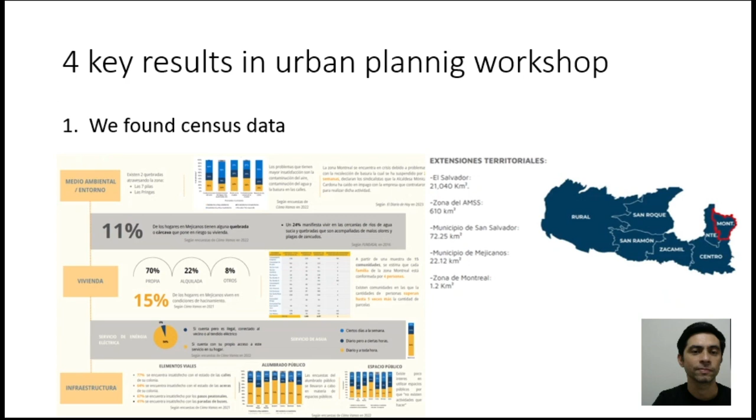The initial key outcome of the analysis conducted in Montreal neighborhoods involves the identification of primary socioeconomic information through a census, specifically tailored to the Montreal neighborhood area. This is significant given the limited availability of such detailed information in El Salvador.

The second critical result entailed the development of a territory diagnosis that encompasses various aspects of the area, including housing, infrastructure, facilities, urban mobility, ecosystem, etc. Subsequently, each team presents a synthesis illustrating how these aspects interrelate in the territorial context.

The third noteworthy achievement is the formulation of an improvement plan for the neighborhood and the identification of critical intervention areas in both infrastructure and social programs. This contributes to a prospective and holistic approach to the study.

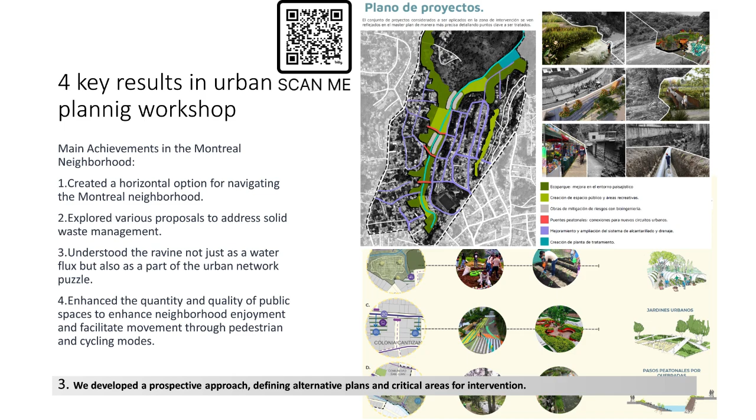Ultimately, diverse urban projects are crafted as part of the workshop, addressing issues such as flooding, solid waste, urban mobility, public space, and stream pollution. This takes into consideration the current and future relationship with the river and, in general, with the riparian structure.

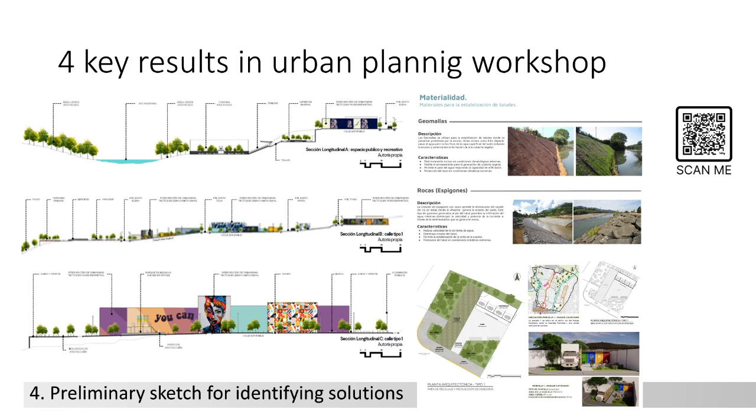And now our students will give us a brief about their urban design projects.

Hello, my classmate Karla Ramos and I, Johanna Sanchez, will present the Neighborhood Improvement Plan, which focuses on improving the road infrastructure along Montreal Avenue as the main route in the colony and therefore the most used by its residents.

Below are the proposed projects for intervention, which include the incorporation of urban furniture, the right-of-way comprising sidewalks, flower beds, and bike lanes, as well as the inclusion of parklets to promote local economic and commercial development. You can see the architectural plans on the left side illustrating each intervention.

The proposed interventions stem from the following key concepts. Firstly, sustainable mobility focuses on promoting the safe use of alternative transportation methods and pedestrian mobility. Secondly, public space and safety, creating meeting and rest areas.

We also have waste management, establishing a recycling and waste management program to reduce pollution and promote environmental sustainability, and local economy, creating a space that encourages the local economy of the area's residents through commerce-oriented parklets.

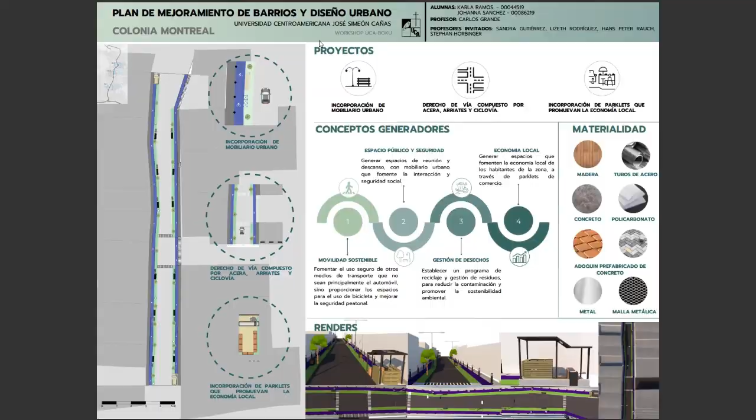Good evening everyone. This is our last document in which we show you what we investigated about Montreal. We did a diagnostic of the area about the physical problems present in the site, like pollution, traffic, and environment.

First of all, I want to comment on the problems of Montreal that we focused on, like the population of the area not knowing of nearby places where they can make their purchases or grocery shopping, and the people not having good illumination there. We have developed two projects located in the downtown area.

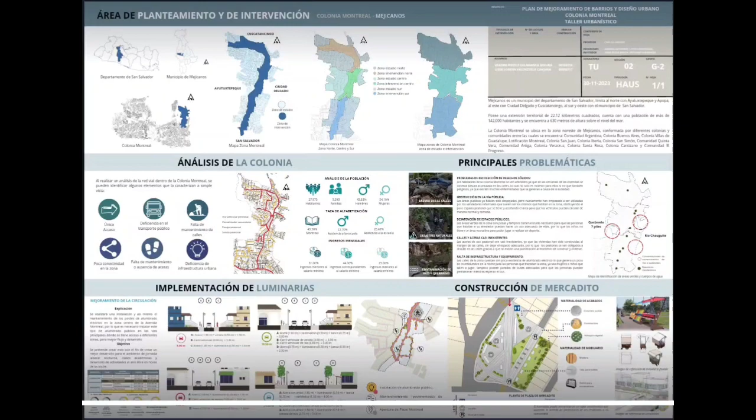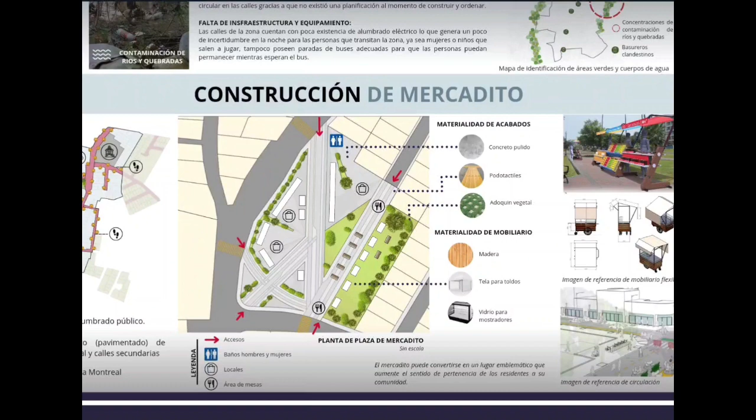The first project is based on the construction of a plaza for free trade. The concept of ephemeral architecture has been taken, in which merchants will use furniture that is not fixed, to use the space according to the user's needs. This space seeks to be a boost for the economic development of Montreal.

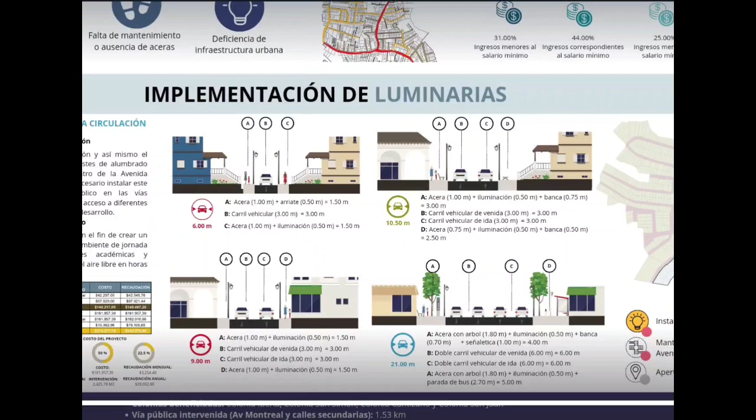The second project consists of placing public lighting in the downtown area, giving a greater perception of security in the area. Since this is its location, it will also be taken into account to generate a better illuminated square, so that it can be used at night with people feeling safe. Thanks.

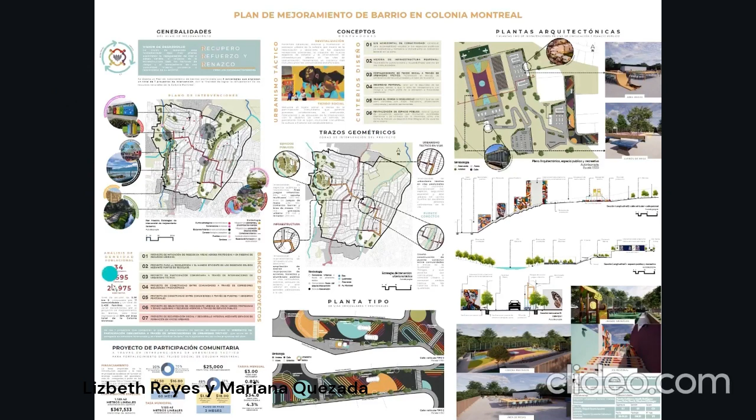Good day, it is a pleasure to share with you the Neighborhood Improvement Plan in Colonia Montreal. The development vision of the plan is to achieve the recovery of natural resources in the neighborhood within a study area of 0.56 square kilometers, representing 55% of the total area of the neighborhood. 7 projects have been designed and categorized into 3 intervention strategies.

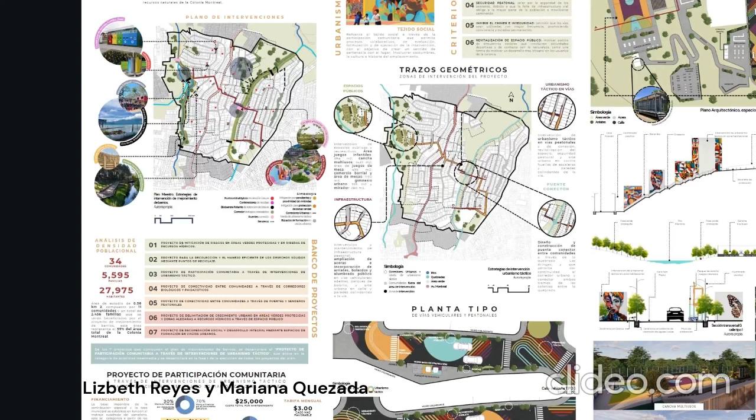The first involves reforestation, sanitation, and recovery of natural resources. The second focuses on accessibility and connection between communities. The third strategy involves integration and training to strengthen the social fabric.

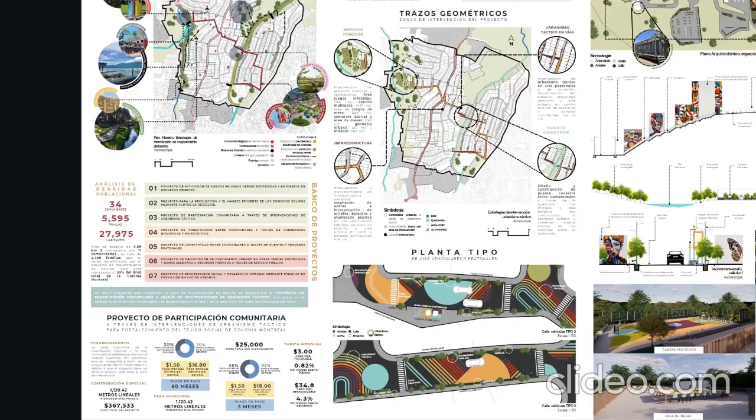Out of the 7 projects, we will provide detailed information on the community participation through tactical urbanism intervention projects. Before diving into the description, a financing instrument was proposed to assess project feasibility. A special contribution was designed for the execution of the works, along with a municipality tax for maintenance. The project concept is the revitalization of spaces and the strengthening of social fabric through tactical urbanism.

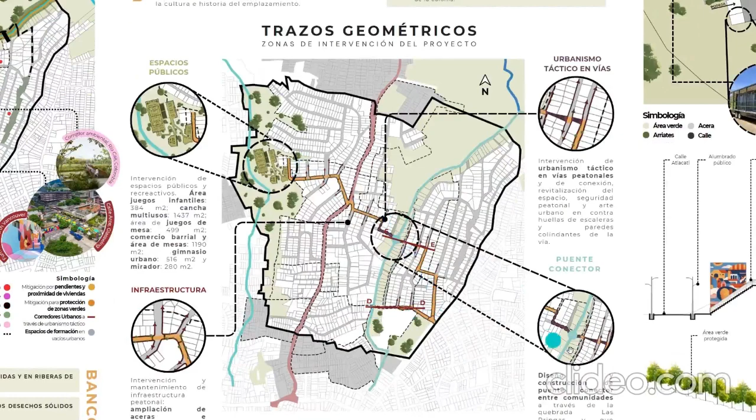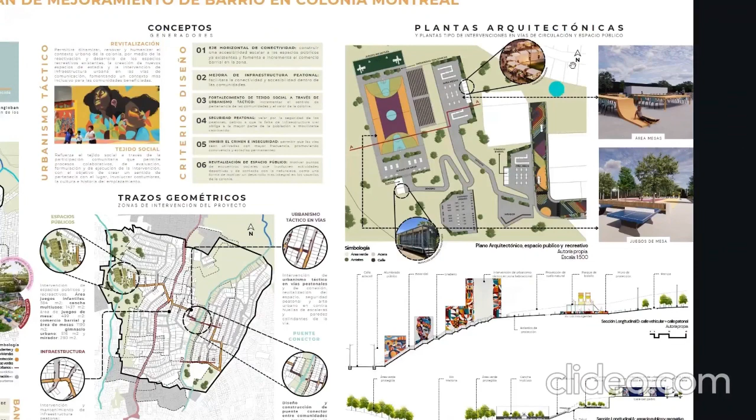Criteria such as horizontal connectivity access, infrastructure improvement, and public space revitalization are taken into account. As seen in the blueprints, sections, and renderings, the project involves the intervention of a horizontal axis with 3 identified street types: a vehicular street with parklet interventions, a vehicular road, and a pedestrian path.

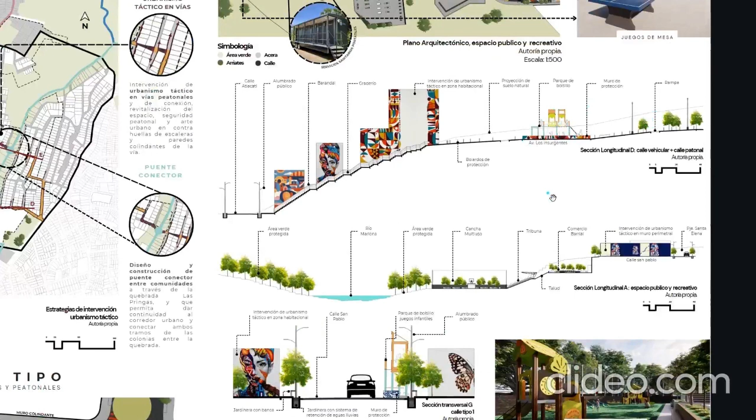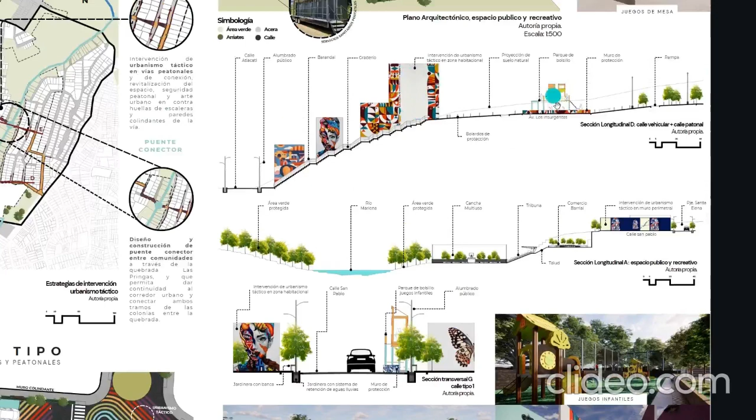Tactical urbanism interventions are carried out on each, including street and wall interventions, sidewalk expansions, incorporation of plant beds and parklets, urban equipment and furniture, and pedestrian safety elements. Additionally, the design of plant beds considers the incorporation of a rainwater retention system to mitigate flooding issues in the area.

Lastly, as shown in the rendering, the revitalization of Montreal Park is proposed, featuring a multi-use court, children's play area, board games area, space to promote neighborhood commerce, an urban gym, and a lookout point. Thank you very much for your attention.

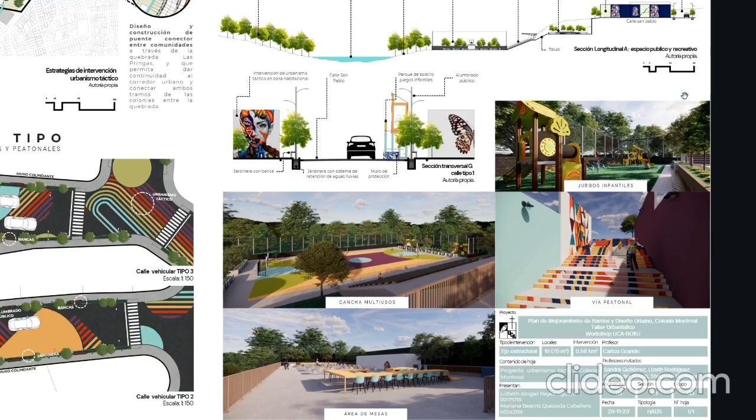Hello, today we present the final project of the Urbanistic workshop with a typology of intervention of structural axes. For a better understanding, it has been divided into 3 parts: location and definition of the area of study and intervention, identification of problems and beneficiaries, and development of the project.

As a first point, the spatial context is recognized, which is Colonia Montreal in Mejicanos, and for a better understanding, 3 zones are classified. In the next stage, a neighborhood analysis was carried out where the main problems were identified: first, the damage to the natural environment, and second, the damage to road networks and mobility.

As these are the main axes for neighborhood regeneration, we chose to work in the north area of the colony, analyzing the primary and secondary streets, and the complementary and abandoned spaces present.

As a third point of the project, we propose a reorganization of the road, which includes optimal and functional spaces. For this, we will make use of tactical urbanism to promote soft mobility in the area, presenting 5 types of interventions under the same concept that will depend on the width of the road.

As a complementary part of the intervention, we present a solution for the improvement of rainwater collection to avoid disasters in the area and to make use of it. Finally, the financing instrument is presented.

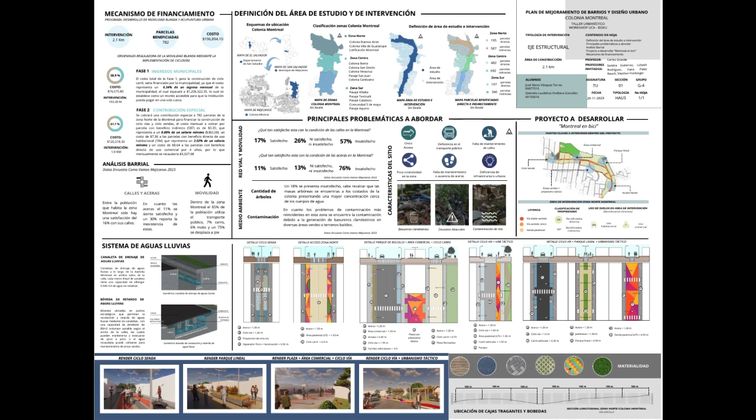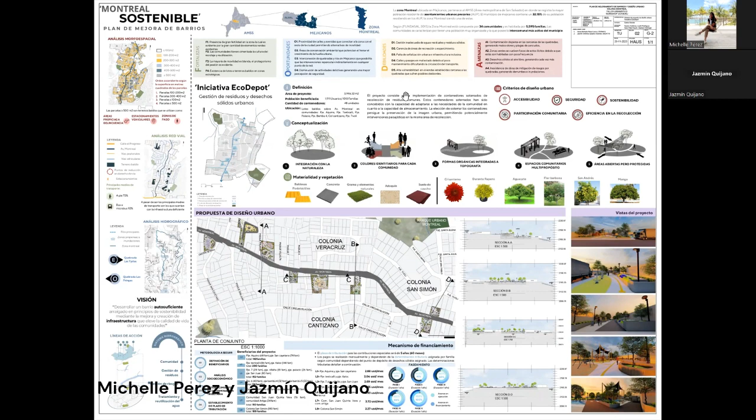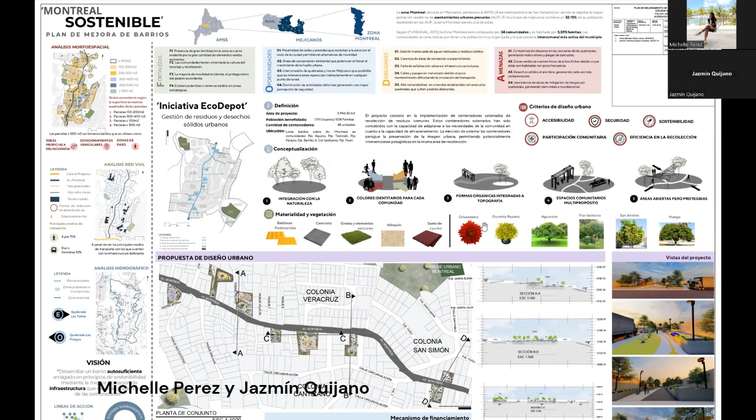Group 5, we present Eco Depot, an urban initiative addressing solid waste management in the Montreal community. The project aims to restore the urban rivers in the area while serving a vulnerable community. After analyzing the area, we identified that the rivers are a key ecological factor the community has. However, they are marred by extensive garbage, posing threats to the environment and public health.

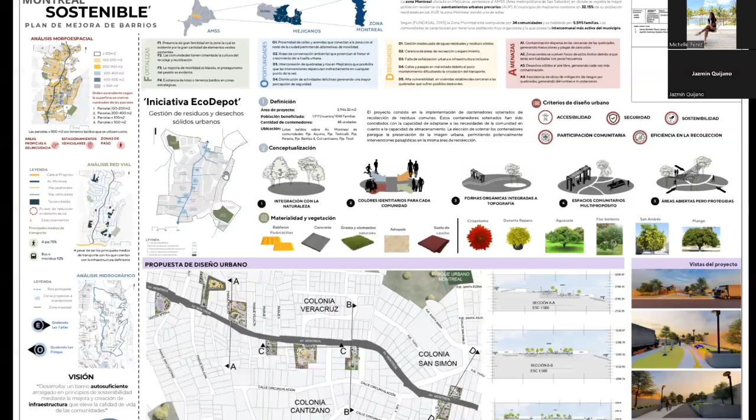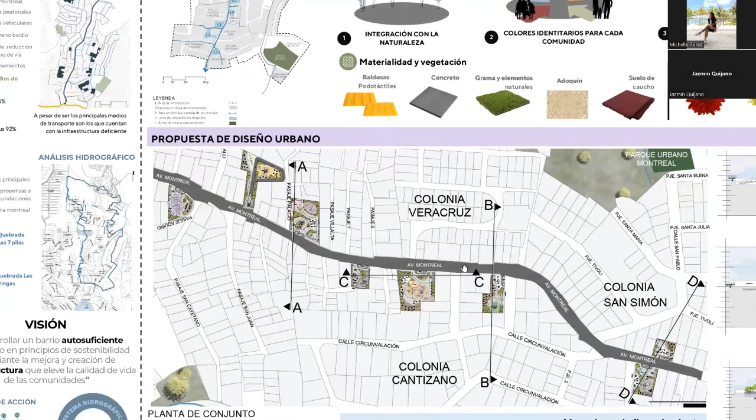Motivated by this concern, we conceived the transformation of vacant land into integrated waste collection points. Employing underground container technology, we developed pocket parks on each site, enhancing community well-being through nature and recreation.

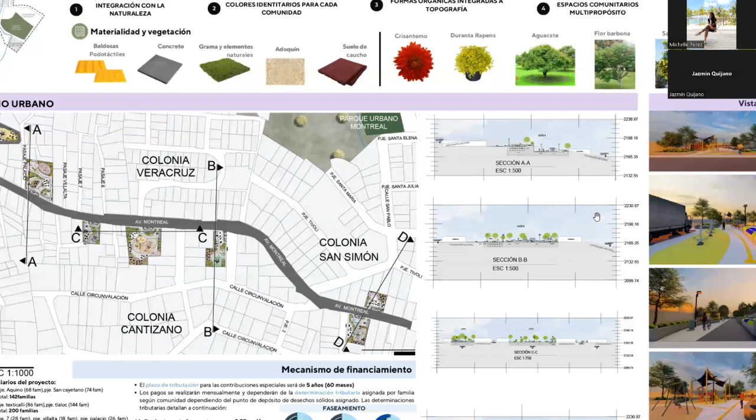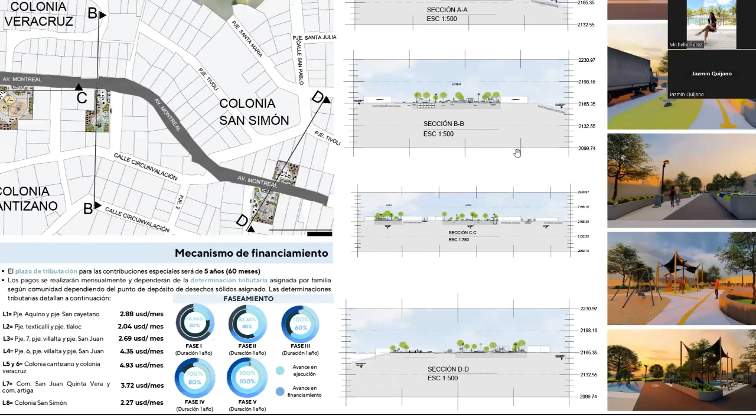Furthermore, we prioritize sustainability, incorporating urban drainage systems in each pocket park. Following topographic curves, these systems ensure water collection and filtration through bioswale planning and infrastructure systems reaching the river from underground, so that the atmospheric cycle increases water quality, strengthens fauna and flora habitats, and provides a more sustainable community.

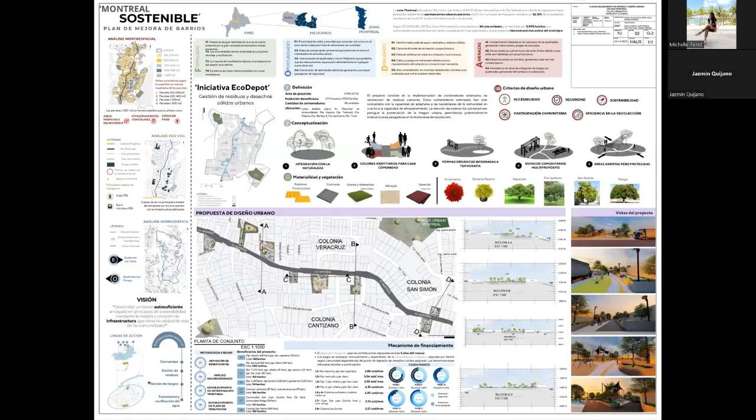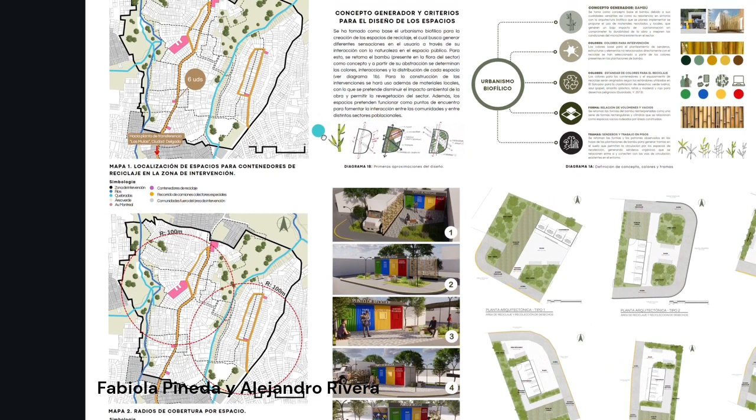Good afternoon, we are Group 7 and our project is called A Project for the Collection and Management of Solid Waste Through Recycling Points. It consists of the construction of recollection spaces at strategic points that allow adequate waste management and help reduce the problems related to garbage present in the Montreal neighborhood.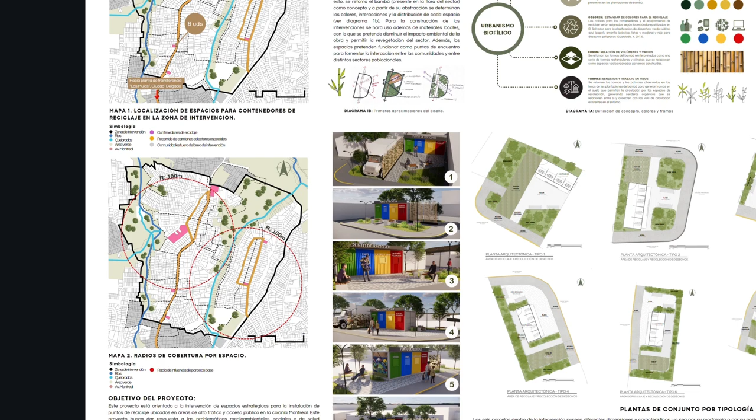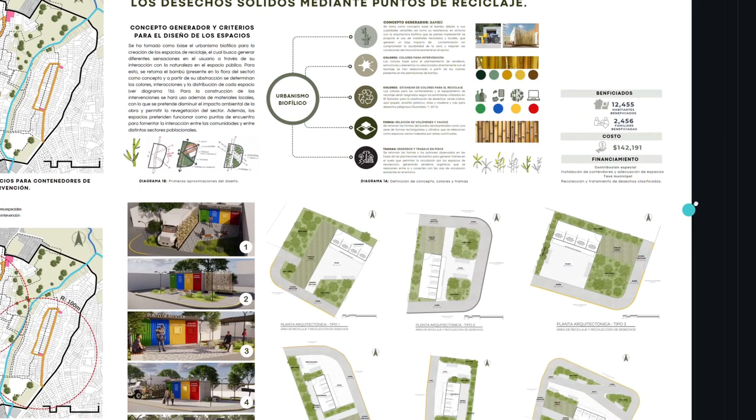Furthermore, these spaces will allow interaction between different social groups and will be part of the public space. The design is based on bamboo and seeks to encourage interaction between users and the environment through 6 different proposals. The project also includes training residents to use the containers, classified into 4 types of waste, that will be transported to the transfer plant Las Mulas.

A construction cost has been estimated at $142,000 and will benefit 2,456 families.

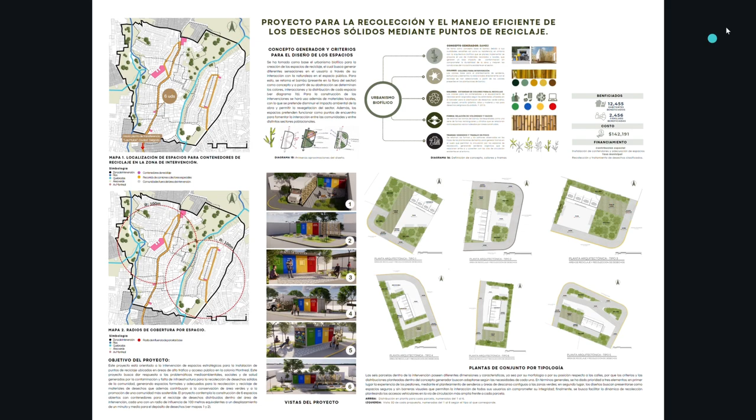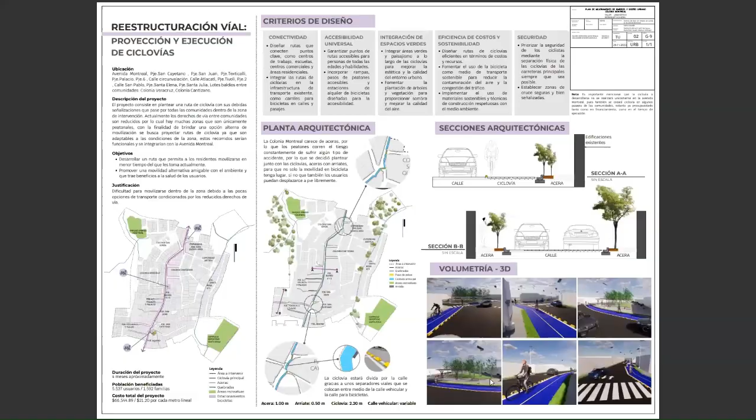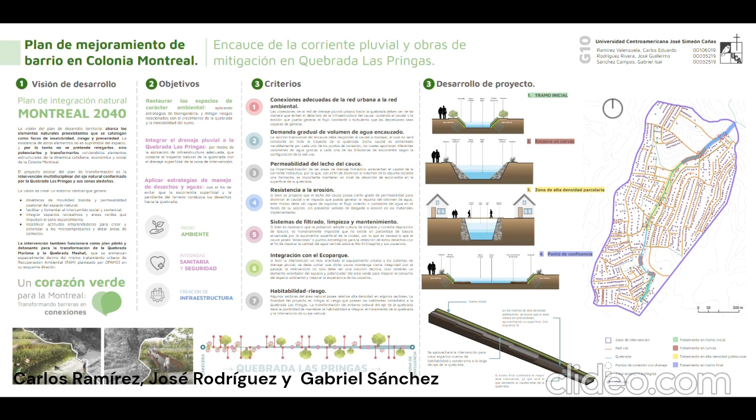Our vision of development is called Natural Integration Plan Montreal 2040. The main objectives of this plan are to take up the natural elements of the existing environment, like the green area and the axis of the creek, and transform them into structuring elements that dynamize the area, taking advantage of the social environment and natural resources. The intention is to create a green heart for the Montreal neighborhood, transforming barriers into connections.

The project we are presenting today takes up three objectives of the entire improvement plan: number one, restore environmental spaces; number two, integrate storm drainage into the Quebrada Las Pringas stream; and the last one, implement waste and water management strategies.

We have 7 criteria on which the project is based: adequate connections between the urban and natural context, gradual demand of channeled water volume, permeability of the riverbed, erosion resistance, filtering, cleaning and maintenance systems, integration with the ecopark, and the relationship between habitability and risk.

Finally, we propose 4 types of cross-sections, depending on their location on the axis of the creek, where we detail lining strategies, shape, and edge treatment. We have 4 types: a section at the beginning and at the end of the creek, on a curve, and on the high-density housing zone.